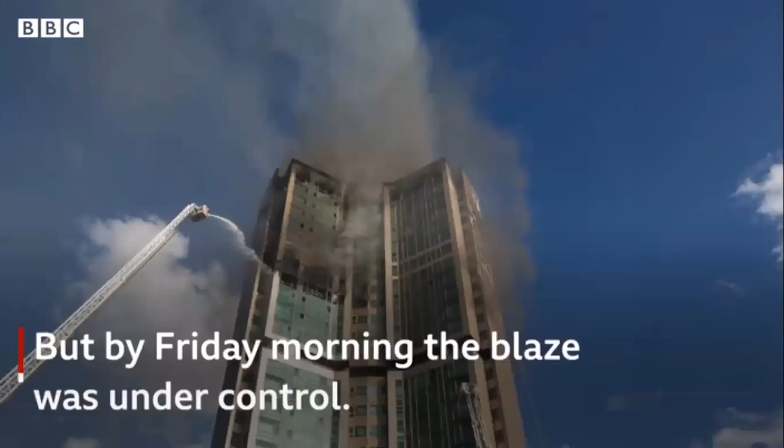I think it was just about 15-20 seconds. You have seen the way the facade of the building is burning, as if the envelope itself is on fire, and that is how the fire has spread through the facade of the building, whatever envelope material they are using.

Now let's have a presentation from Mr. Warick. He is Chief Fire Officer of MIDC and Director, Maharashtra Fire Services. Mr. Warick, you can please go ahead with your presentation.

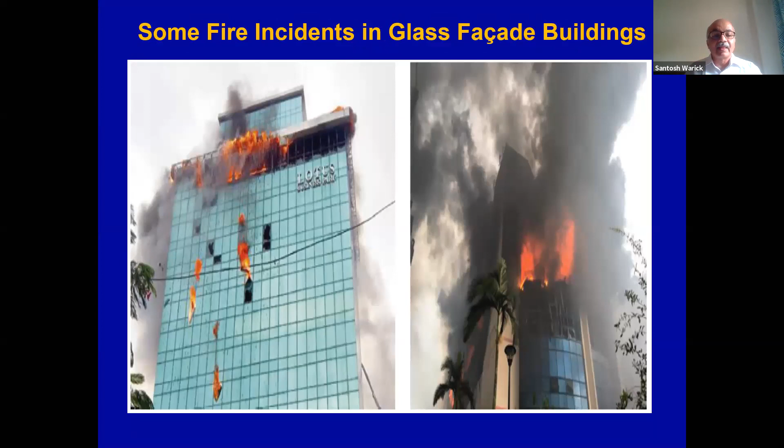So a large number of high-rise buildings are basically using facades, and in case of fire, it is very difficult to deal with such type of fires.

There is rapid spreading of fire externally, just as we saw from the external side, due to high wind velocity and combustible materials externally available for burning.

In case of fire, the characteristics of such fires are very difficult because these are all high-rise buildings, so evacuation time is more, the fire load is also more, and the gushing wind at that level contributes to the rapid spread of fire externally on these facades.

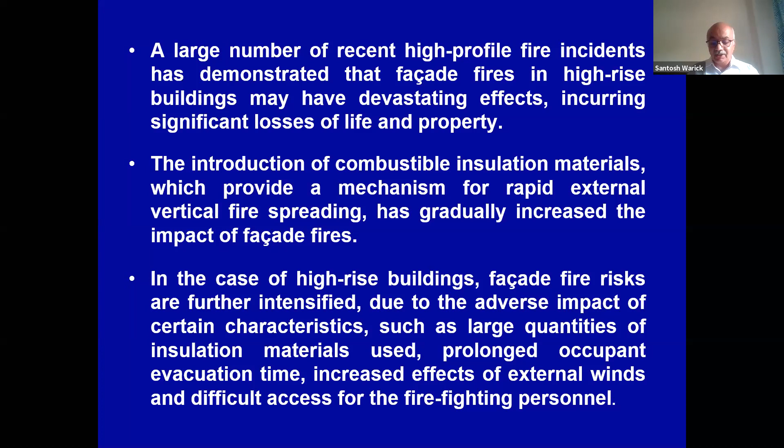These are again some incidences occurred in metros wherein firefighting from the external side is the only option to carry out rescue operations and firefighting.

High-rise building facade fires can initiate either through an internal source or from the external side - from DG sets, electrical installation transformers, or HVAC rooms on the floor, or from garbage containers in the building, from where it can start and spread.

The glass facades are in different compartments where combustible materials are stored, so it may internally grow, and externally also it can spread.

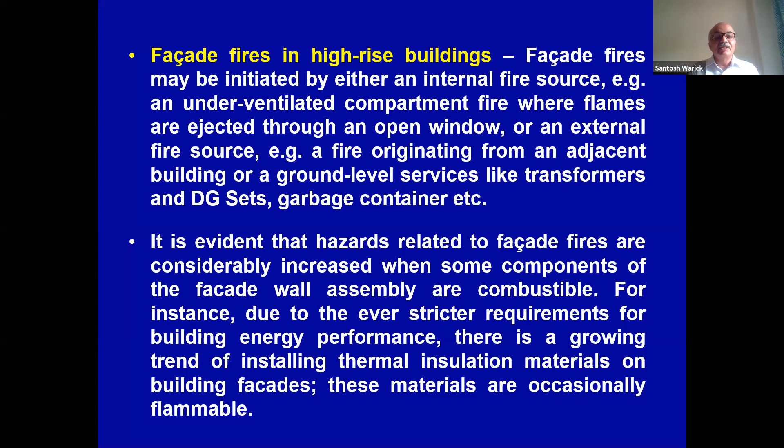In high-rise buildings, as compared to low-rise buildings, the composite panels or glass materials used externally create a stack effect or leapfrog effect on the building.

These fires are very difficult because, as we just saw, the burning debris coming out from these tall buildings may lead to pocket fires or may set fire to adjoining buildings also. So it is really a threat for the surrounding areas too.

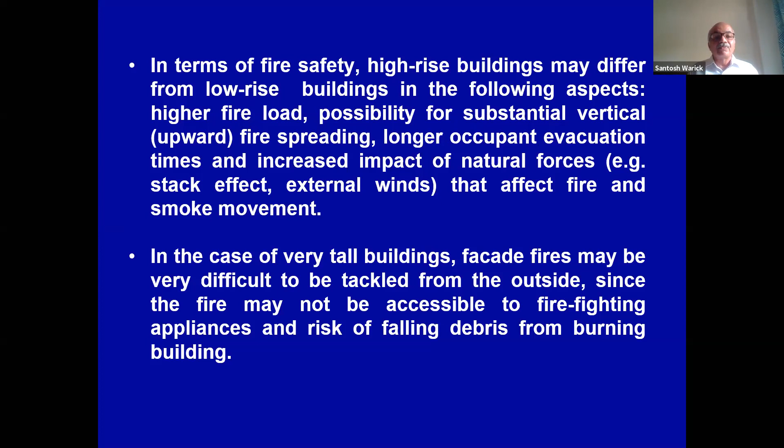Normally such buildings come up on a large scale because of external facades for aesthetical or glazing purposes, for the beautification of the building. But in case of real danger, because of non-availability of ventilating the fire, it becomes a very crucial issue for firefighters to carry out evacuation of the building and also to douse the fire.

These are the recent incidents occurred across the globe, in Dubai, Shanghai, and Grenfell Tower, London, which was the eye opener for the world, and everybody started talking about this challenge. So this is the major issue.

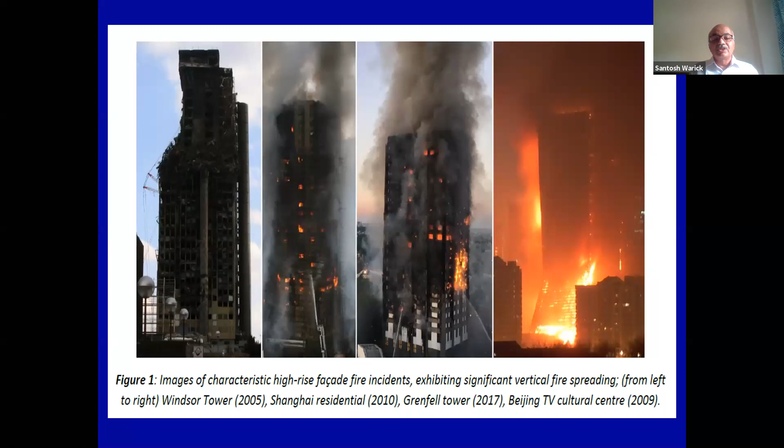If anything goes wrong in a building, the fire may spread from the external side or the gaps available within the buildings through the ducts or the gaps between the slab and the cladding. These are the major culprits from where the fire can spread on the external facades.

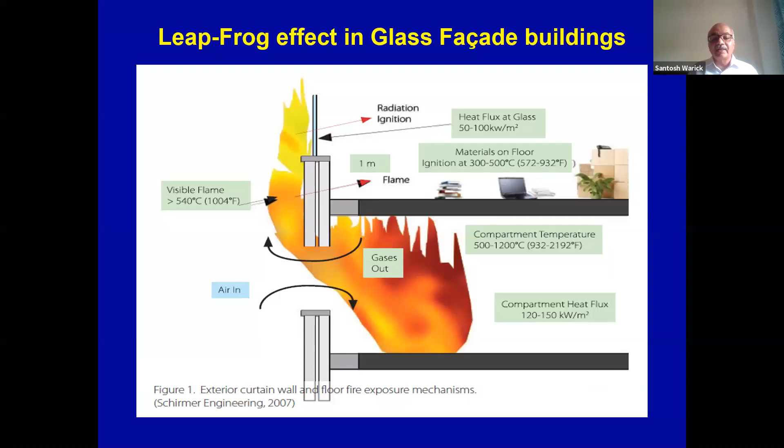Building envelopes, as I already discussed, are very aesthetically important for the building. NBC or any other international code does not put a barrier on the use of various types of material for the aesthetic view, but it poses certain problems in case of fire emergencies.

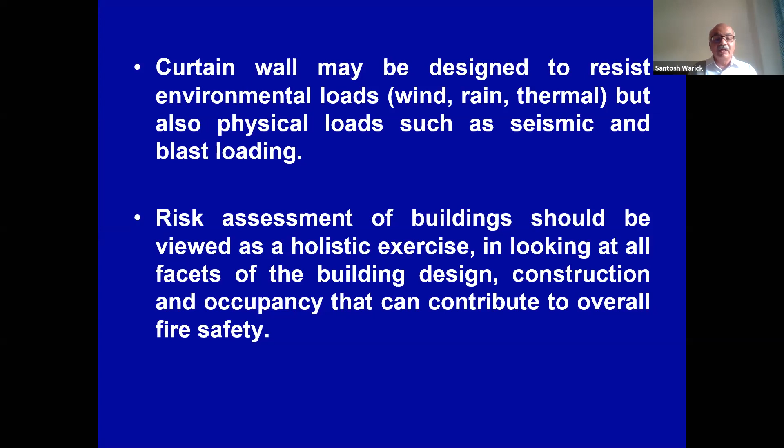So the major issue is fire spread via the surface of the building. This is one type of cladding, ACP - aluminum composite panels. In the incidences we saw, the ACP caught fire, and due to gushing winds, it spread vertically upwards and the entire building got engulfed in fire.

The second issue is spread from one compartment to another, due to the stability, integrity and penetration quality of that compartment material, and whether it has that much fire resistance rating. As per NBC, it should be minimum 2 hours fire rated. If it is glazing, it should be minimum 1 hour or 2 hours fire rated, depending upon the type of construction.

The fire separation within the facade system, from the exposure hazards point of view - if anything goes wrong on the adjoining side, due to radiant heat, the fire can set in on the adjoining building, and through the chimney effect, passing through openings and cavities available between the facade and the building slabs.

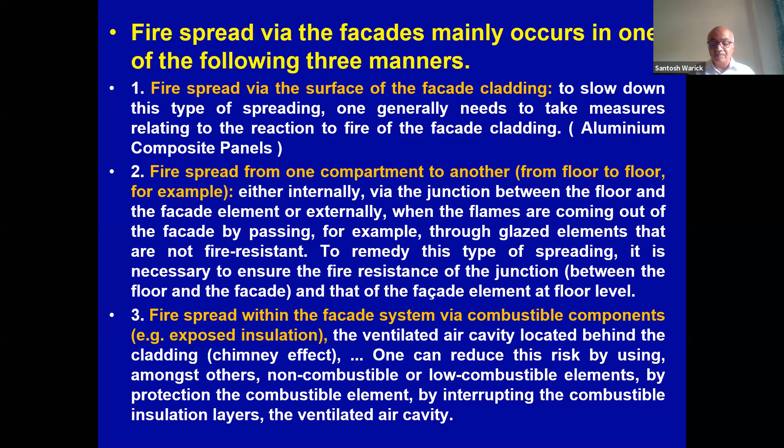If proper sprinklers are installed, then proper compartmentation and sprinklers can contain this fire. But if such facility is not available in the building, the fire may spread externally or internally through these vertical ducts, or where combustible ceilings are used, it can travel upward.

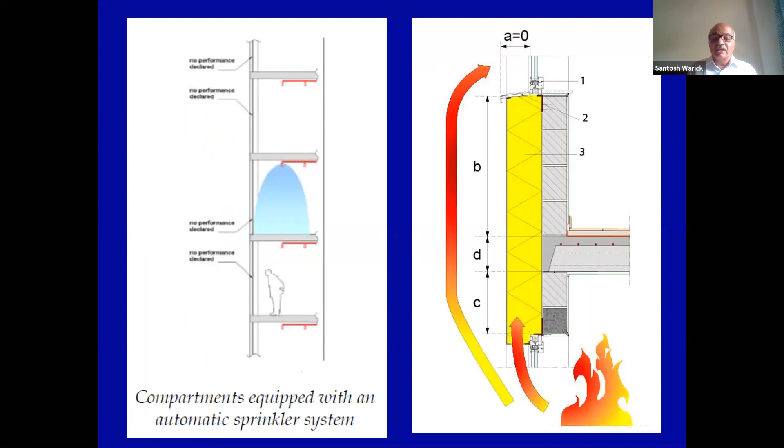This is again a diagram showing how cladding with fire rated sealant is used - fire stopping used between the floor slab and the facade. In such a situation, the fire will not spread vertically upwards.

But if it is a combustible insulation material, then fire may travel from this combustible material to the upper floors.

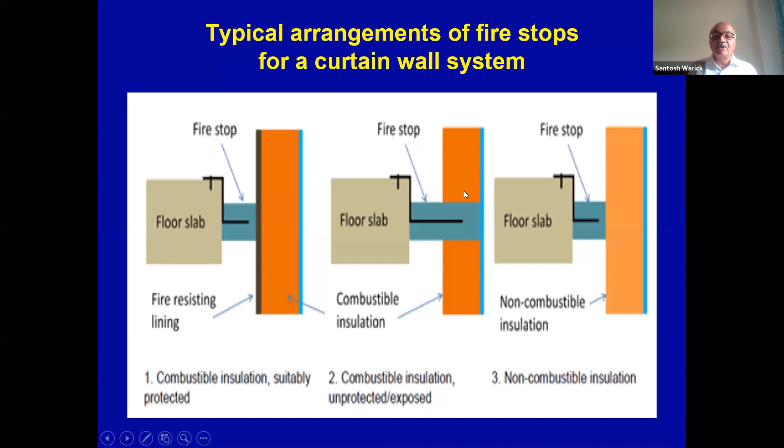So holistically, we have to see the arrangement of passive fire protection in the building. The major aspect is compartmentation, then openings in the floor or compartmentation passing vertically and horizontally - fire stop insulation should be used. Then for air conditioning, proper dampers should be used in compartmentation. Then surface spread, flame spread, combustible material, fire load, and glazing.

Glazing is basically covered under Part 6 and Section 8 of the National Building Code, Part Volume 1. In that particular glazing, as far as Part 4 is concerned, some guidelines are issued vide clause 3.4.10, wherein cross reference is given to Part 6 structural design, Section 8, glazing and glass of the code.

The requirement for the assembly glazing means glass is one part, or any composite panel is one part of the glazing, but the entire assembly should be as per type 1 construction or whatever type of construction is applicable to that building. For high-rise buildings, we consider only type 1 and type 2 construction.

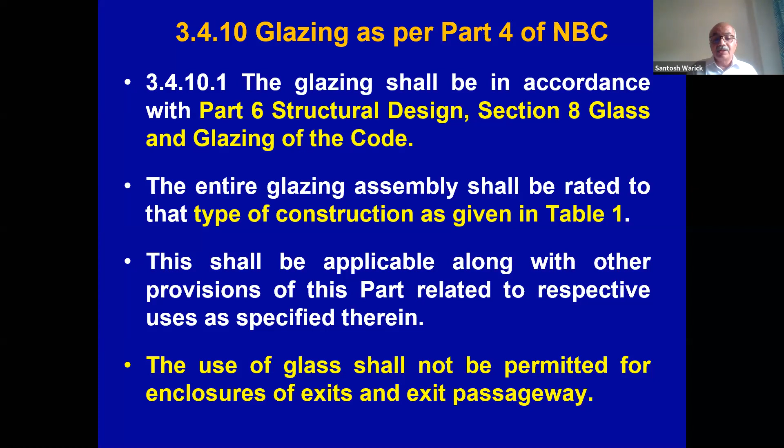As per 3.4.10.2, in a fully sprinklered building, if 9 meters separation is there, then the fire sprinkler head shall be within 600 mm of the glass facade. This is to cool the glass. If the glass is not fire rated, then the sprinkler will come in action and it can douse the fire.

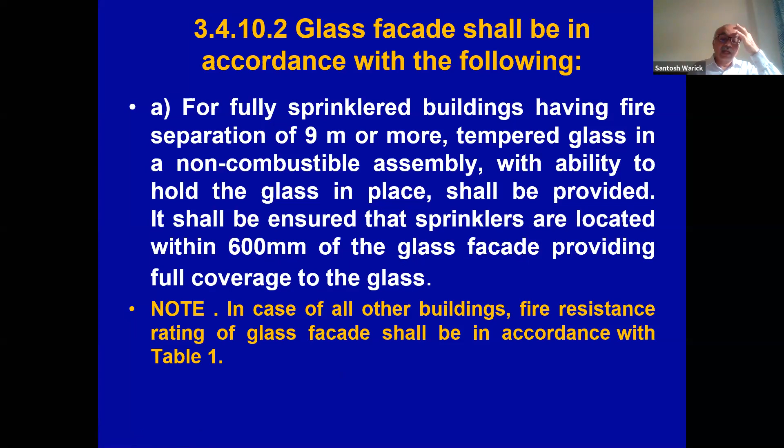Second is how the sprinkler will work. Here the standard sprinkler pattern is shown in this diagram, and the window sprinkler, which is specifically required for glazing protection, works like this, giving cooling to the cladding or the glazing material, so that it has more fire resistance.

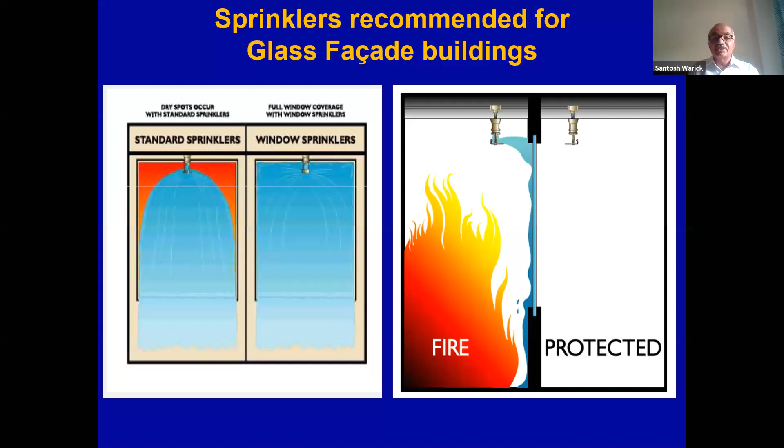These are the standard sprinklers used in the building.

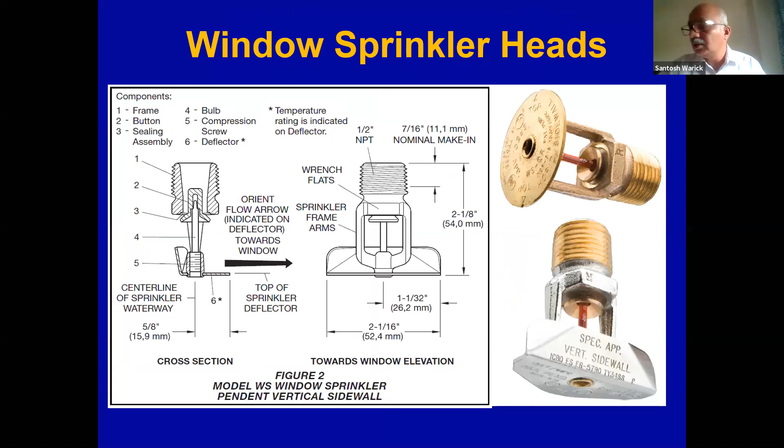Then this is the proper glazing, meaning the gaps between the slab and the glazing or external cladding, how it should be covered up. It should be properly sealed with approved sealant, and there are FM UL approved sealants which can be utilized to seal these gaps between the slabs and the cladding.

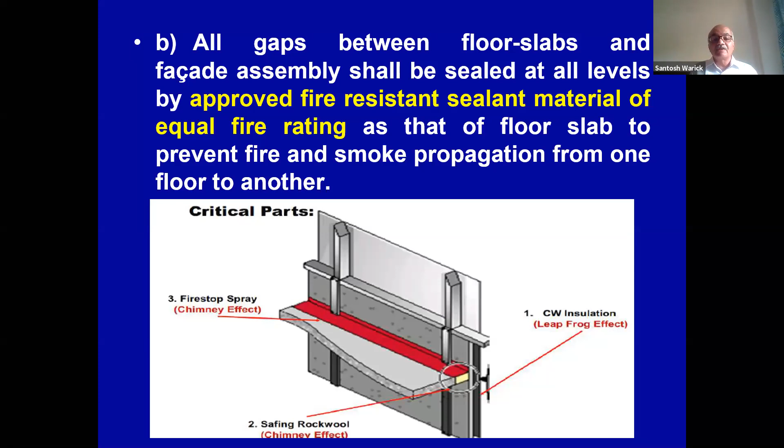Then there is a requirement for openable panels: after every 10 meters of gap there should be an openable panel of 1 meter by 1 meter, at a height of 1.2 to 1.5 meters, and it should be openable from inside. There should be a proper indication provided showing that it is an openable panel, and do not obstruct it. No material should be stored just in front of such openings.

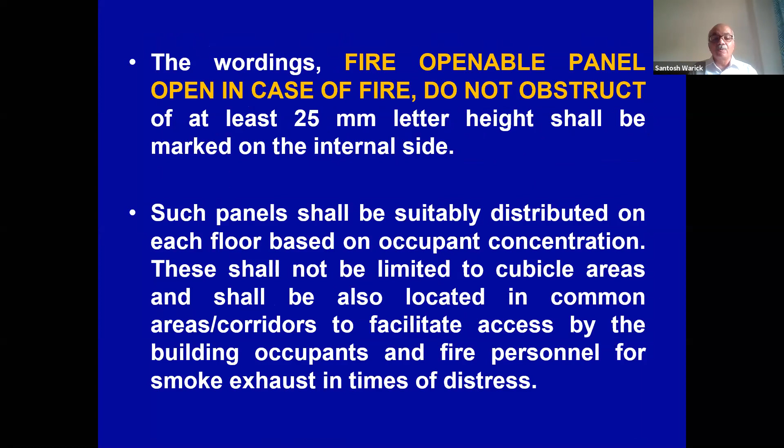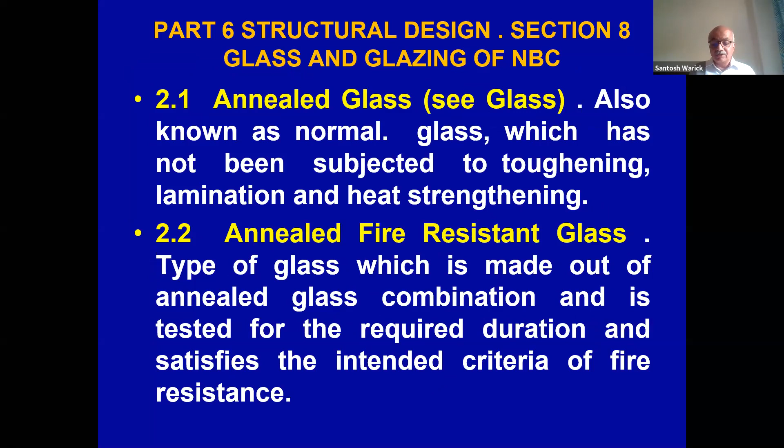As far as part 6 section 8 is concerned, different types of glasses are defined in this section: normal glass, annealed glass, then annealed glass with fire resistance, how it should be used, then curtain walls, non-load bearing curtain walls which can be used as an external frame with proper fixing, typically used for the vertical side of the building.

Then facade is the external side; it is a frameless system that is defined. Then glazing is the act of securing glass or any other glazing material in the building's opening windows, doors, panels. Then the tempered fire resistance glass.

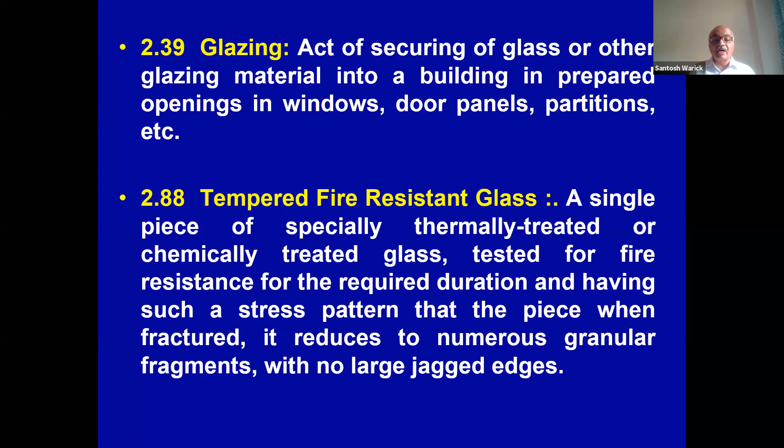This is important from the fire safety point of view: a single piece of specially thermal or chemically treated glass, tested for fire resistance for the required duration, having such a stress pattern in the piece with numerous granules. In case of failure, it should form into small granules, so it should not create any danger to the firefighter or activities below.

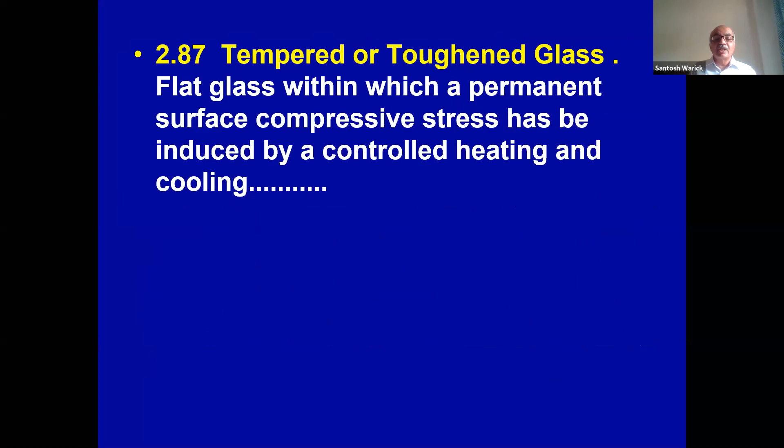There are certain guidelines given with cross-reference to Part 4 of the National Building Code, wherein fire rating and other important recommendations from the life safety point of view are given. As far as the necessities are concerned, this code is related only to fire systems, and it will not cover the requirement against vandalism, breakage, terrorist attack, earthquake, cyclone or any other things.

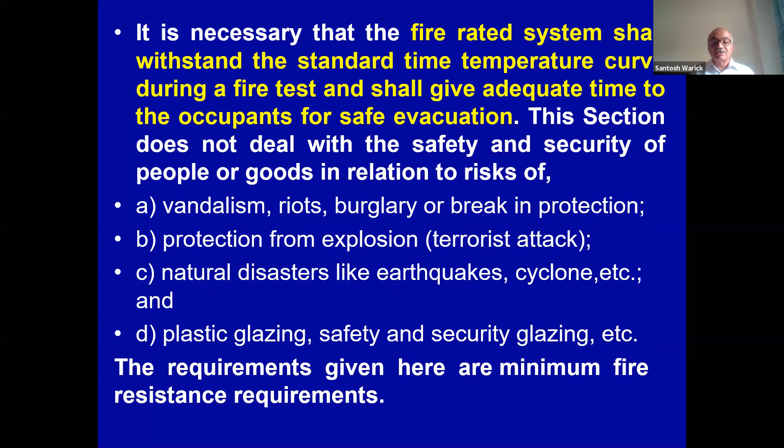So glazing for fire resistance is again important from the fire safety point of view, considering protection of precious human life and property of the building. The external or internal facade shall be of fire resistance, so that you have sufficient time for carrying out evacuation.

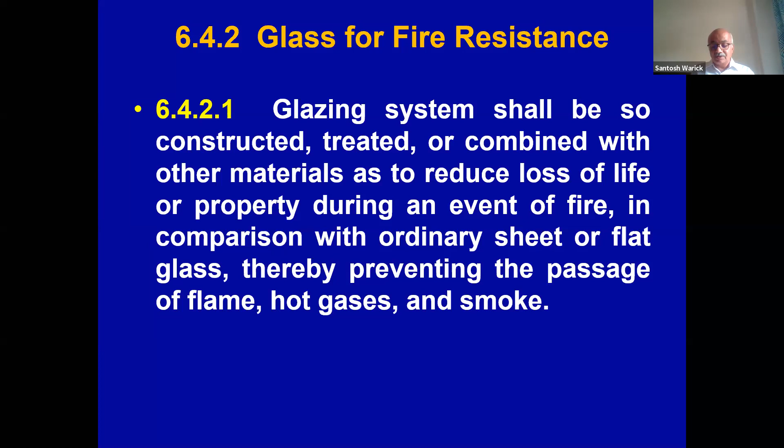In case of evacuation passages or common passages, fully glass shall not be used. That is the requirement. These are some glasses where you can have fire resistant glazing: wired glass, annealed fire resistance glass, tempered glass, laminated glass, double glazing fire resistance glass. So these are some glasses which can be used as fire retardant glasses.

Whatever panels you are using, it should be tested to that particular fire resistance. It is not only the glass which should be fire resistant, but the assembly attached to it shall have the same proper rating.

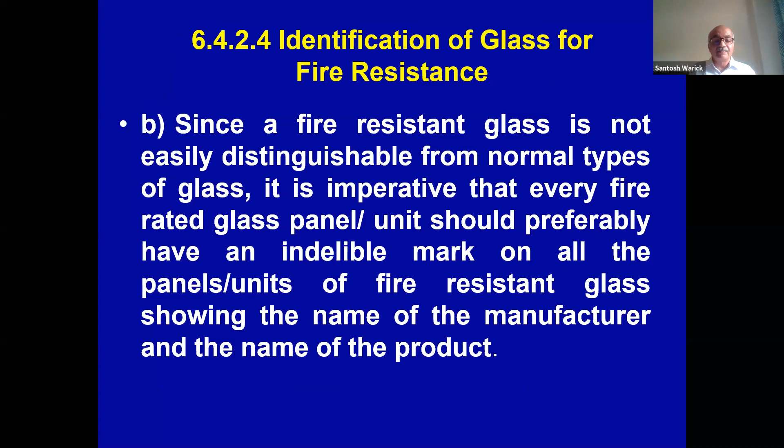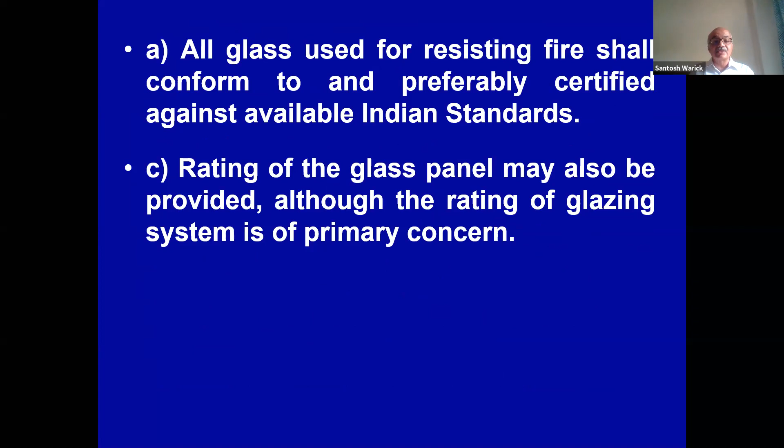It should be certified by either Indian standard or any international standard as per standard practices. This is very important. In Part 4 of the National Building Code, fire towers are provided with fire doors. The route or common passage leading to this shall not be protected with only glass, and fire doors shall not be of glass only. If glass is used for visibility, it should have proper fitting with fire resistance rating of minimum 2 hours. This is the normal common passage or common lobby for the fire tower.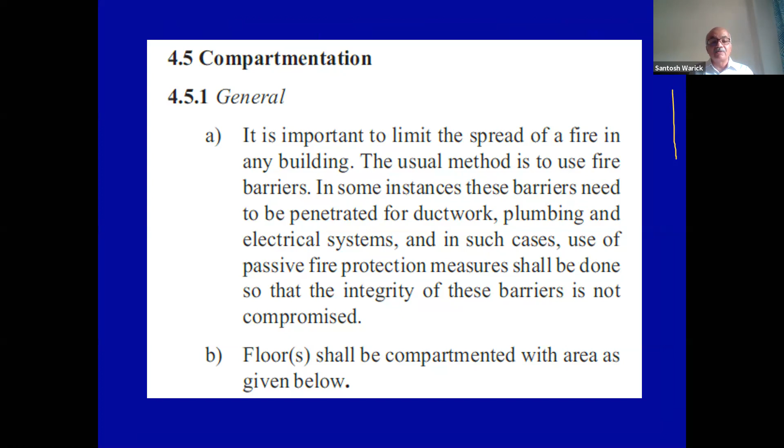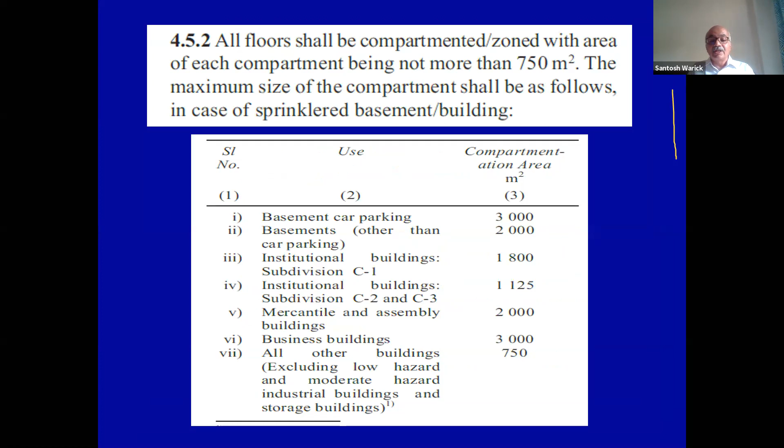Compartmentation is a very important feature in Part 4 of the National Building Code, wherein different materials are used for achieving compartmentation. For basements in hospitals, normally 750 square meters is the recommendation for compartmentation, but the external sides and partition walls, if used as glass or any composite panel, should have a minimum 2 hours fire rating.

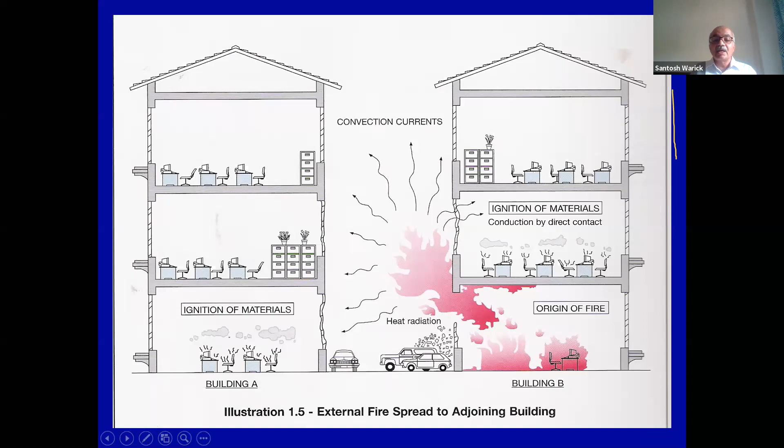The exposure hazard is another issue. If anything goes wrong in a building, that radiant heat can create a problem for the opposite building if proper distance is not maintained between the two buildings. Or internally, it can spread as shown in this drawing—by radiant heat, or through the passage of adjacent compartments, fire can spread. This is another example of where, from the origin of fire, the radiant heat can create problems for the external facades of the adjoining building or the same building on upper floors. This is again an example of radiant heat exposure hazard.

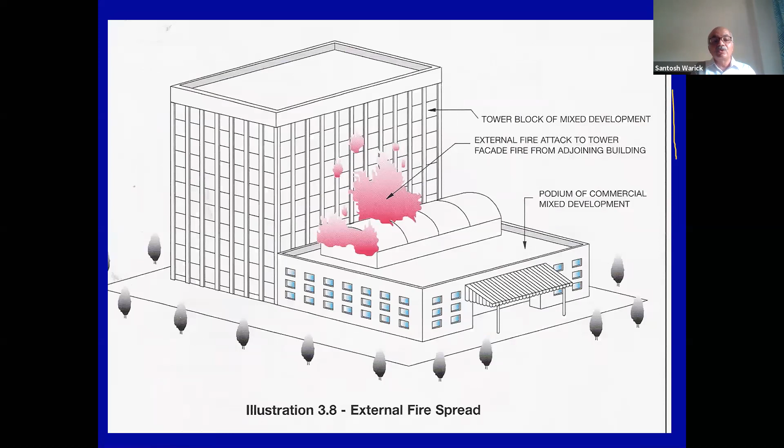So holistically, we have to look not only at the cladding, but the type of construction, the height of the building, the type of occupancy, the availability of automatic detection systems and automatic sprinkler systems, the building compartmentation, the availability of local fire services to deal with such high-rise buildings—whether they are equipped with aerial ladder platforms for external firefighting and rescue operations—the fire hazard load, the internal spread, and the building evacuation strategies. If we holistically look at all these aspects, only then will we be in a position to safeguard precious human life and the property or building envelope.

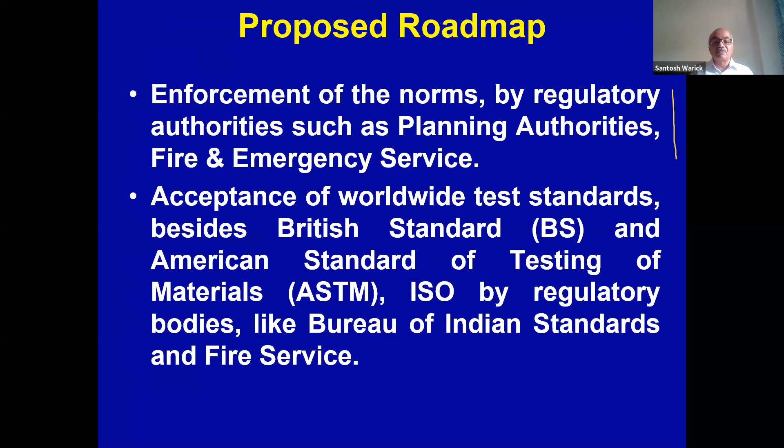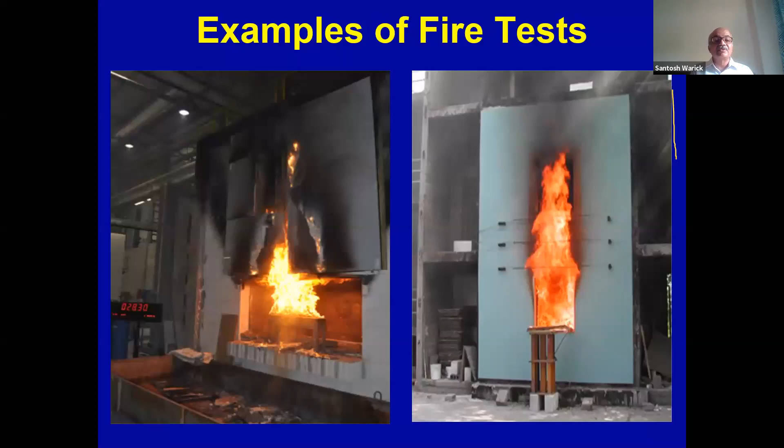The proposed roadmap—unfortunately, we don't have awareness amongst planning authorities and fire services about external cladding. Mumbai Fire Brigade, after a few fires in Mumbai, came up with guidelines for external facades. We have test standards as per British and ASTM standards, but unfortunately we have limited test labs in India for carrying out such tests. These are some views from test labs as per NFPA and BS standards, and some external facade testing features. The only issue is we have to create awareness amongst all stakeholders—architects, developers, civil engineers, fire officers—for more testing of this kind.

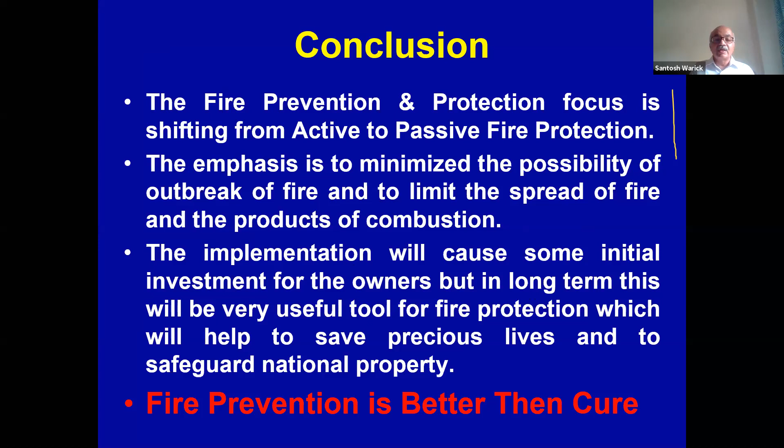A lab should be there, and only tested material should be used for external cladding. So the conclusion is, if we go for fire retardant material at the initial stage as part of passive fire protection, the cost will increase initially, but afterwards it will pay off in tons. Prevention is always better than cure. Considering that, we have to holistically look at this issue. Thank you very much.

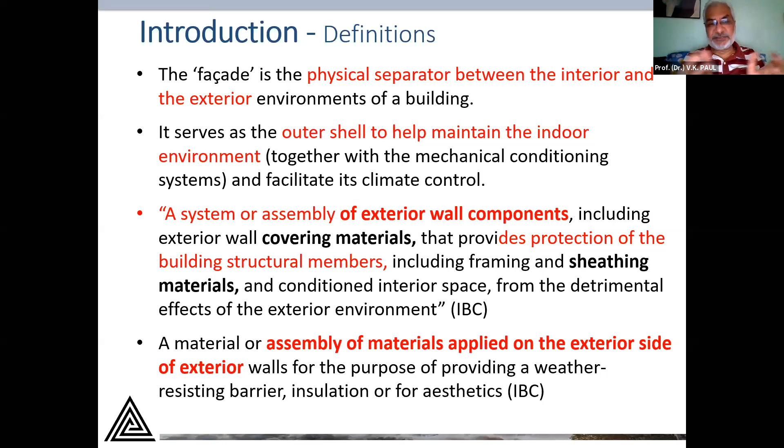And of course, fire is one. So what one is ultimately looking at is a large assembly of things, and many objectives put together will create a solution, and one of them will be fire safety. We cannot keep one objective alone - it's multiple objectives that work together. The objectives we find specific to the envelope are fire safety, firefighting accessibility if at all, asset protection, adjacent building exposure hazard, and business continuity - whatever activity has to continue.

Like for example, in today's building, there were almost 130 odd apartment owners. Now they have to be rehabilitated and taken somewhere else. That's what the government is doing now.

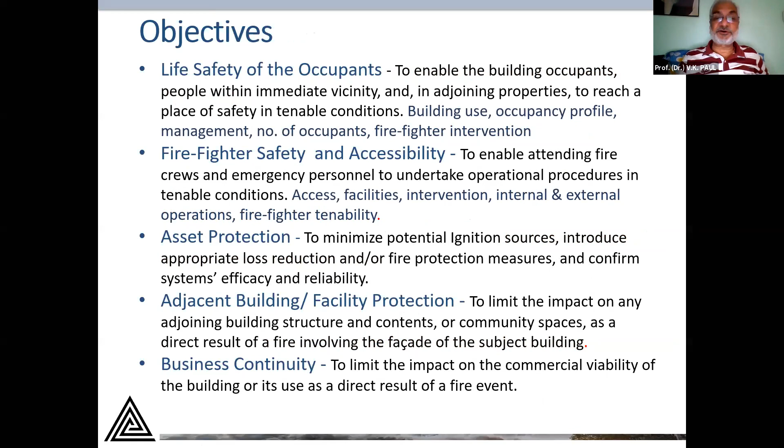Now looking at the facade component systems, this is what I've tried to sketch out - very elementary, wherein first of all, from our so-called architectural understanding, we classify building envelopes into two parts: lightweight and heavyweight. This is actually thermally lightweight versus heavyweight - one has a larger thermal mass, which is basically its capacity to hold heat.

The other way, lightweight is the envelope where the physical weight, the mass of the envelope, is also required to be minimized. So we cannot have a masonry envelope on a 40-storied building - it's going to have a lightweight composite construction, and that's where the whole problem starts happening. For 10-15 floors, we can have a masonry structure, which gives a much better advantage compared to lightweight. So for high-rise and tall buildings, one is looking at lightweight, and that's where the composition and complications of breach of two layers of assemblies start happening.

That's where the problem happens. Then we have a framing system, unlike the heavyweight masonry kind of envelope, which could be fire rated or non-combustible - it could be both. Now this kind of envelope necessarily has to have an external cladding, because weather and a whole lot of other purposes have to be fulfilled - weather, infiltration, exfiltration, insulation, they all have to be fulfilled.

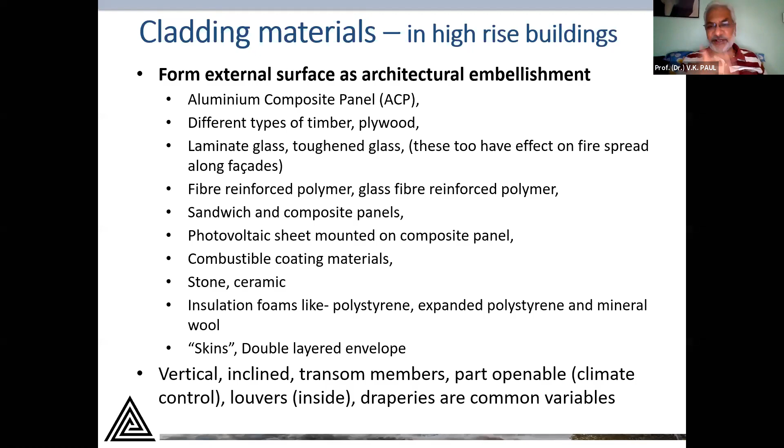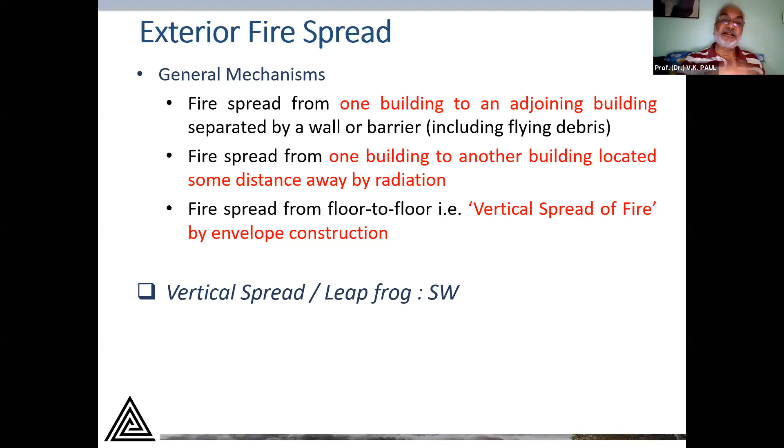Coming all the time, Mr. Barik has already covered that there are adjoining buildings, separation internally, outside, inside, and the spread of fire can happen. Now, instead of discussing NBC and pointing out things people generally don't like, I thought let's look at some other codes as well.

If we look at material composition, there are strict codal requirements for having restrictions up to 10 floors, or 18 meters height in UK and UAE, on what kind of materials are to be used. In our case, class 1, 2, 3 low and medium flame spread materials are still allowed, meaning even on an external surface, low to medium flame spread is still permitted. As far as a ban is concerned, we don't have any ban, nor does Australia, but up to 10 floors there's a ban in UAE and UK for certain components.

Insulation of cavities is very strongly regulated in Australia, UK, and UAE. We also see allocation of responsibility, and this is a very important part. In UAE, the consultant is required to have responsibility for all assembly, testing, approval, design, installation, and inspection.

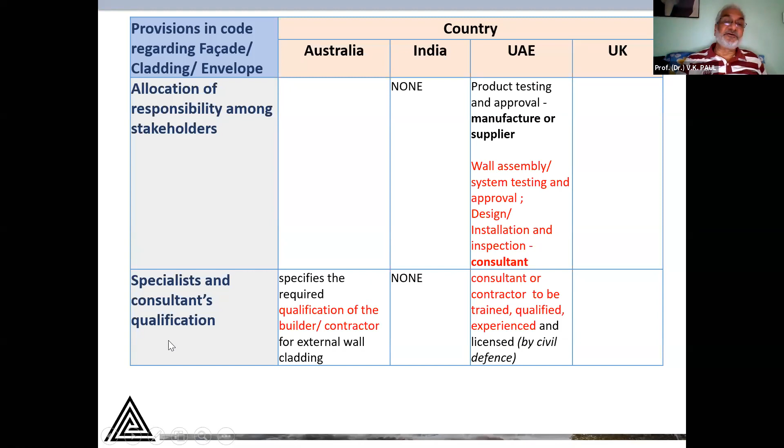Now this is something where even a novice, a kind of lecture-bazi person like me, can also become an expert. So you have to have a person who owns the responsibility, and that's very important in a repeatedly vulnerable area. Specialist consultant qualifications are also being talked about.

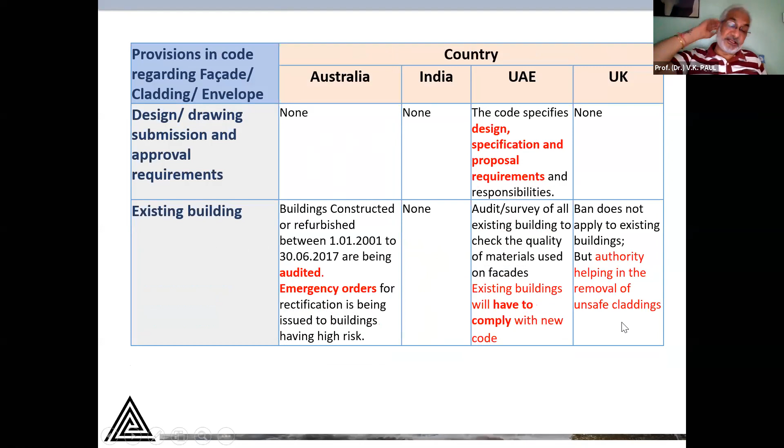And then we also have this issue of what kind of detailing is required, wherein UAE design specification proposals require detailed explanation. For existing buildings, in Australia, UAE, UK, there are some efforts to upgrade them, and in UK the government is facilitating this. Full-scale auditing and testing is asked for, not just a simple furnace or part assessment of a component.

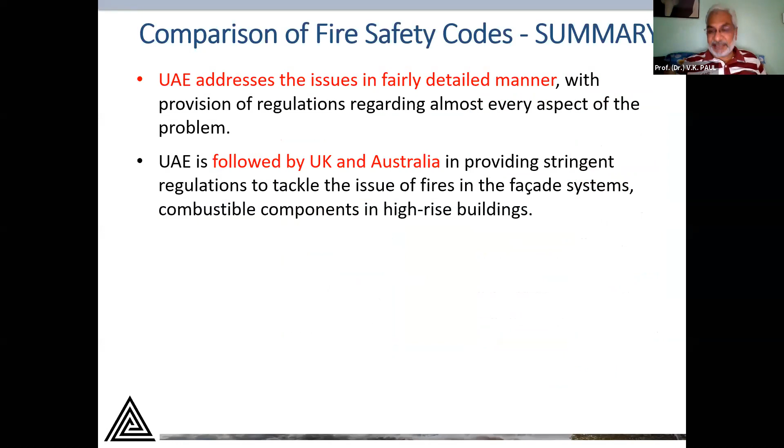There are penalties, there are building priorities, where certain priorities are given for the envelopes. So as far as this part is concerned, we find that elsewhere, codes tend to be a little more responsible in tightening the kind of building envelope that is required.

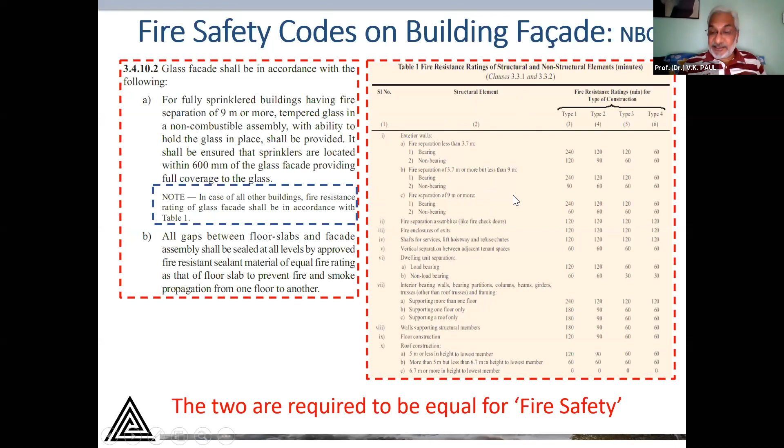But my question to myself is: if this left option is not there, the right is to be provided, then logic says the left is equal to the right. So is the provision of the sprinkler 2 feet away equal to the fire rating here? And if yes, then how? If not, then what? Now, the limitation of the sprinkler is also important to mention, because if there are transoms or bands coming inside the glazing, and we try to put water over that, does it give a uniform layer? That still is a question.

Of course, there are possibilities of a failure. Sprinklers under NFPA were so reliable that they removed the requirement of fire-rated spandrels and flame detectors way back. But that's because the consultant, the contractor, the execution, the monitoring, and the full-scale testing are so very stringent. And even in that, they are looking at 7% failures.

Unfortunately, if we put all our efforts into one particular option, then possibly there is some kind of skepticism. I don't want to touch on the kind of performances, etc.

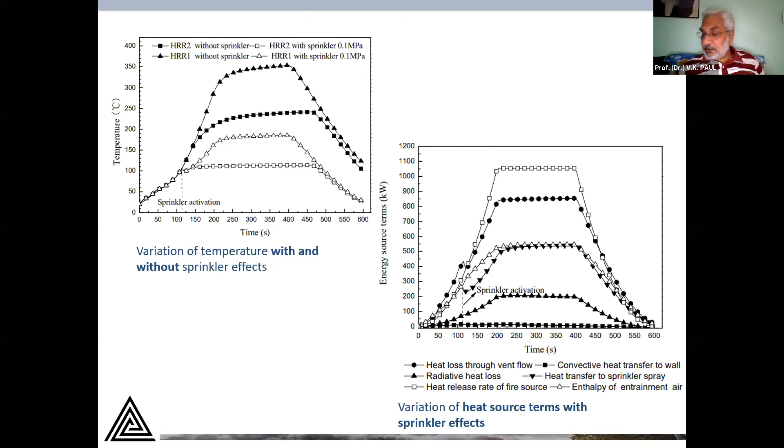But this is something I love, because it says that even when sprinklers are tested, the sprinkler actuation tested on a glass or anywhere, the temperatures still tend to rise above 150 and close to 200 degrees Celsius. So I'm not very sure whether all glass types will survive above 150 or 200. My understanding is toughened glass may survive around that kind of temperature, but nevertheless, that's an issue somebody needs to look at.

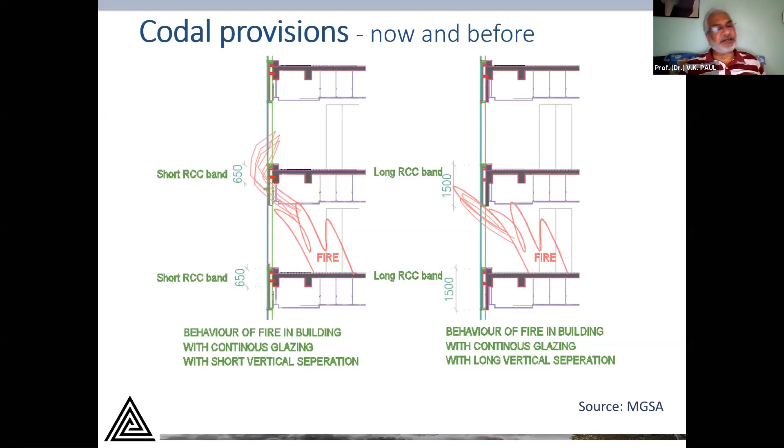Way back, there was also a spandrel requirement, where on the right hand side we find the fire gets deflected with a 1500mm spandrel, but now that part is removed, so it tends to close it. Possibly it was a better way, but nevertheless one can still adopt some deflection like that — it's an interesting thing.

Now the other thing is about the codal requirements, and one interesting thing one finds is that an openable vent for the smoke is to be provided 10 meters center to center. Now this bothers my mind — first of all, at what point of time is it to be used, maybe in terms of stress?

So when does the stress happen? What is the situation of stress? At the time of stress, would there be somebody there to open this? And if there is an openable part, I'm not very sure what kind of water flow in front of that would happen, including there may be some kind of member, but nevertheless, so there is a provision.

But the question here is that if a vent is provided, wouldn't the same vent then create a leapfrogging of flames rising up again? Because at that time, the stress has already happened, which means more smoke and hot gases are inside, and they can lead to the flames going up again. So there is still a question. Maybe I'm not an expert, I have no claim to expertise, but there is an issue.

Warik Saab and Sharma ji were mentioning about the envelopes. Well, these are all envelopes. Now, in these envelopes, there's the notion of smoke vent, the notion of the spandrel, and there are these members in between.

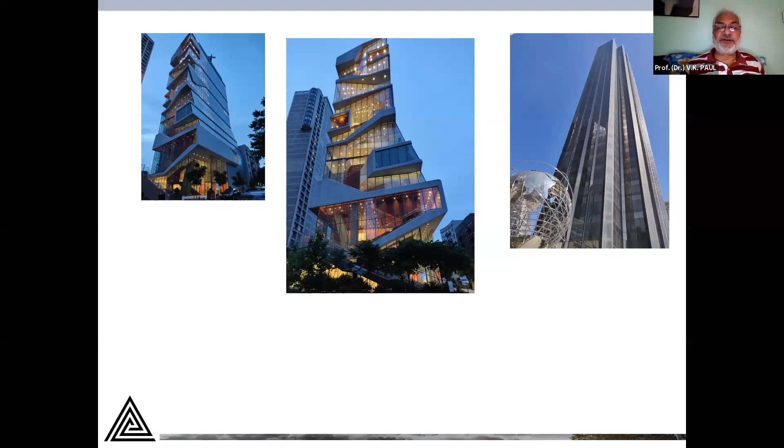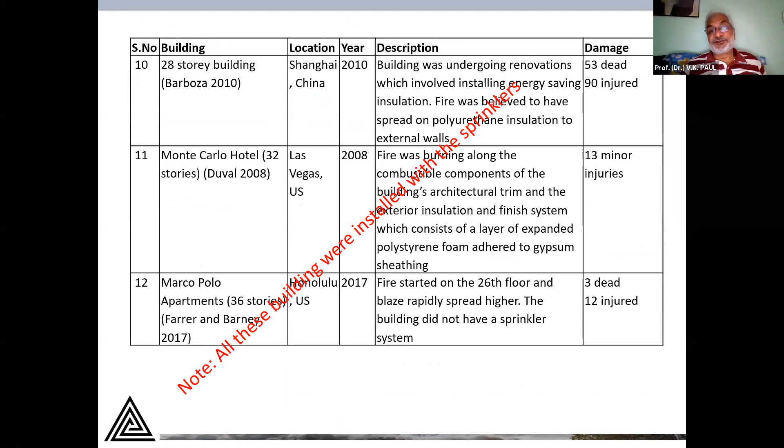Now, there are a whole lot of fire incidents all over the place one can look at. There is a big list, but my understanding is that most of them had sprinklers. So again, my question is, to what extent do we really depend on one aspect and consider the entire safety resting on that one aspect? There are pictures all over the internet of envelopes on fire.

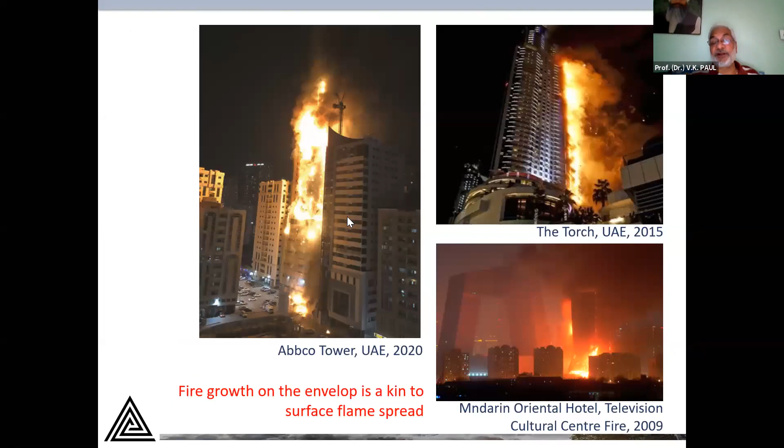And this is what our morning picture on the left-hand side, what was being discussed here in the morning, the film that we saw. Left-hand side, left corner is the photograph of the building that is left now.

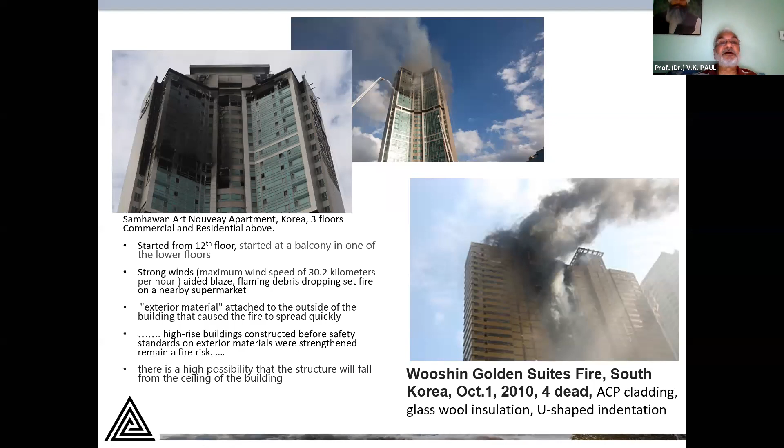Now this is a very interesting thing I found, that there is also a choice of material we need to be a little more careful about. I find that it's not the ACP or the polyethylene that is the problem, it is the aluminium itself that is the problem, because when aluminium gets water on top for firefighting, it creates some kind of dust aerosol, and that aluminium carbide creates a huge amount of heat.

What this particular literature I found says is that using water on aluminium is something like using rocket fuel. Probably aluminium carbide is actually a rocket fuel. So what I find is aluminium itself is a problem.

So what kind of materials? It's not only about being non-combustible, it is non-combustible, but which non-combustible ones are to be taken? This I'm not going to discuss. I'm not going to discuss this.

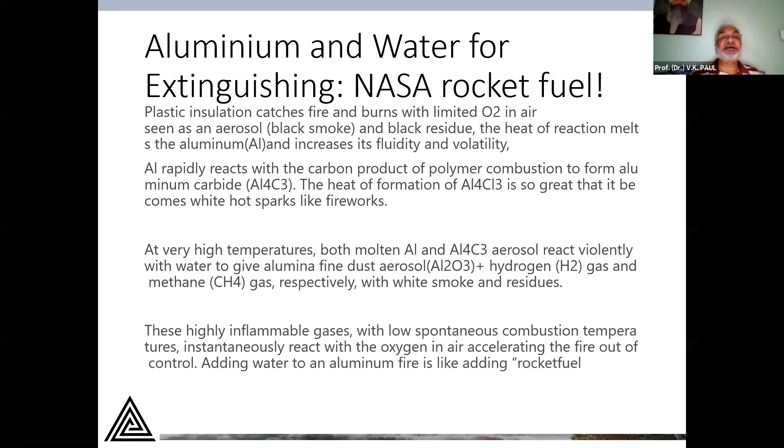Now coming to all these limitations of design, code, materials, everything will keep happening. But wise people will always innovate. So the way I'm looking at it is, in your mind, if you have a big vocabulary of how the phenomena happens, where the risks are, what the code does and doesn't do, and what you can do, you can create your own innovative solutions.

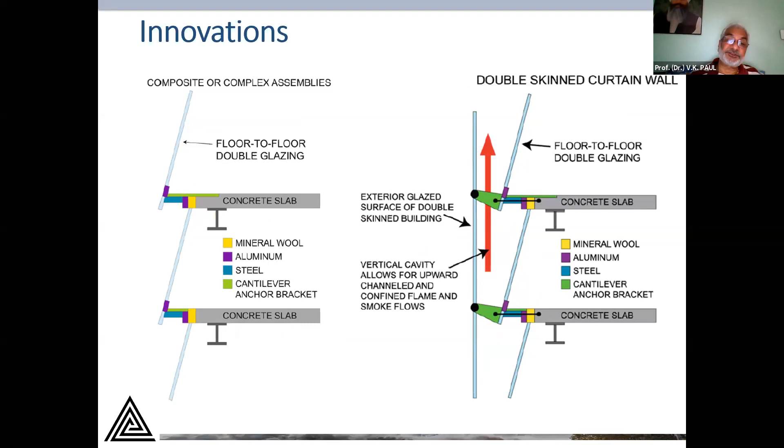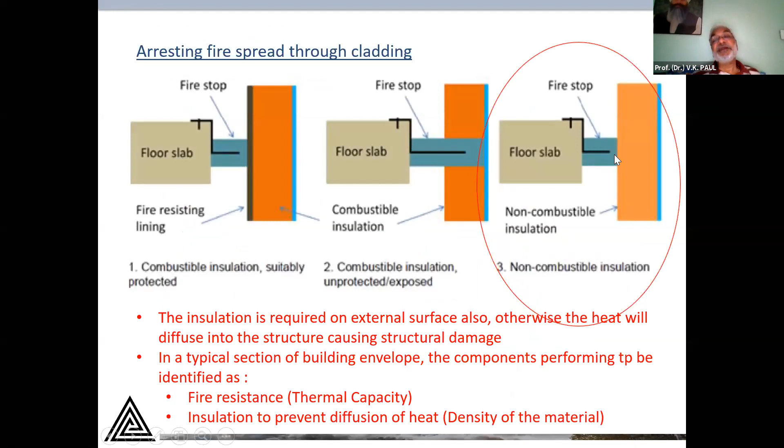Of course, these are all hypothetical processes, and we find many of these things. This picture was shown by Mr. Warwick also, but what I would like to point out here is that on the right-hand side there is an insulation, but this insulation is inside. Invariably, insulation in building envelopes will be on the outer side, and that's where it creates a problem for heating outside, because for sustainability, maintaining U values less than 2, or whatever is required, needs to be followed.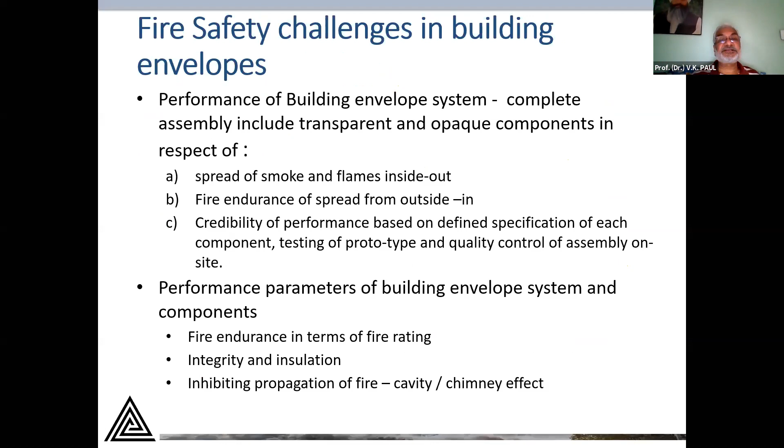I can leave this as well. Here basically I'm trying to say how the fire will always tend to go towards the glass, and then there'll be a whole lot of difficulties with cavities, etc. I can leave this as well. I can move to, okay, now let me come to the last one.

What we need is a clear performance objective for the envelope. I'm not interested in looking just at glass, openings, sprinklers, or doing this, that, and the other. I'm interested in total performance, where everything put together gives me safety for fire, fire resistance, incombustibility, no flame spreading, etc. So what is that criteria? I'm trying to look at that kind of criteria.

The other thing, out of all this understanding I've been able to get, is that the last thing anybody can look at is opening an envelope and allowing flames or smoke to go out. I've scouted enough literature, but everywhere the only condition I've found very clearly is that once the envelope is allowed to break, allowed to open, then it is free for all. So that opening is the performance requirement.

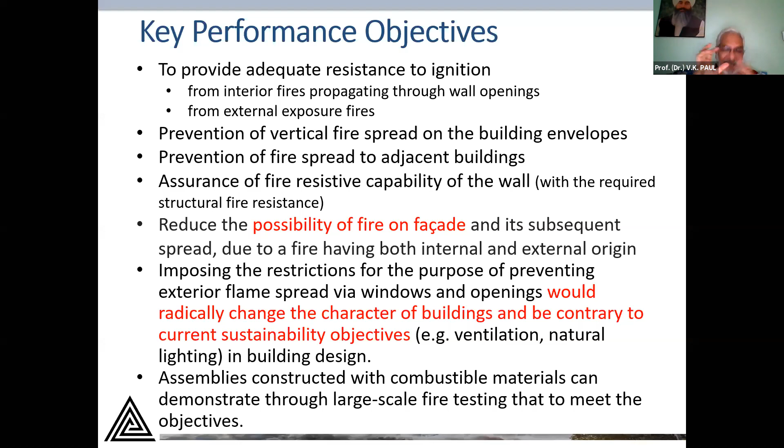So what I'm looking at is like 1, 2, 3, 4. If we can capture all the performance requirements and state that as the objective of my design, including the fire aspect, that will serve better. Unfortunately, that doesn't seem to exist right now in our own domain. So if I can create a defined performance objective of envelope and facade, leave the general sustainability aspects for others to decide, and only focus on fire safety, I think that goes a long way.

I've tried to discuss a lot of these points, but if there is any question, I can try to answer. That's basically what I wanted to share. No answers, but basically to throw open the gamut of fire safety risks that exist. Thank you very much.

Thank you, Dr. Paul. I think you have really gone deep into that. We try to be firefighters, trying to be on the surface where the fire is burning, but you have really gone into each panel, interiors, and the way things are going, and probably what needs to be looked into.

Now we have Sandeep Goel also. I think he has got a few slides to be shared. Let's have that perspective. He's the person who is providing the facilities and is a consultant, so he goes deep into the things while executing. You get to know really where the problems are and what is the more difficult situation for him. So let's hear his view also. Mr. Sandeep.

Thank you, Sharma Sahab. I am supposedly to be the consultant, which I feel I still do not deserve, because there is so much which I keep learning from my other colleagues. But we have been given responsibilities to ask for advice, and we try to work with deep passion and sincerity. We do realize the subject is so wide, it requires a more holistic understanding. I feel very small in my understanding when I speak to senior colleagues like yourself, Mr. Warwick, Dr. Paul, or Chiller sir. I really feel small about the knowledge I possess about it. But having said that, I would like to share some inputs about my understanding on this piece.

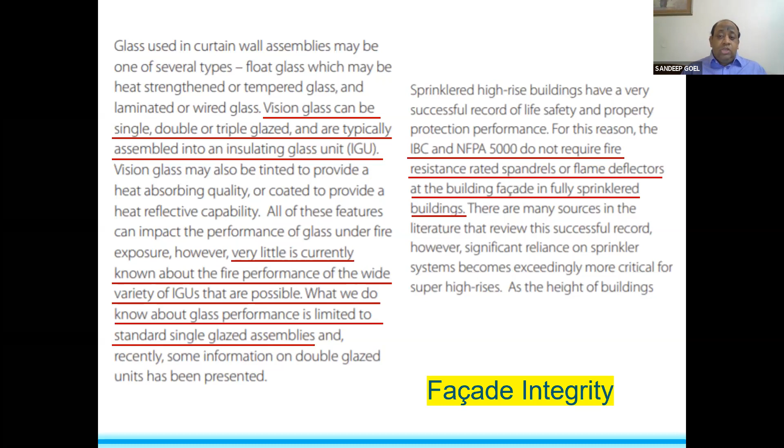As far as facade integrity is concerned, and what Dr. Paul has explained in very good detail about Grenfell - what exactly happened was that the consultant landed up choosing the wrong material for the facade, which was not meant for such a high-rise building. As we saw the comparisons done by Dr. Paul, it very clearly highlights what kind of suitability is accepted depending upon the height of the building. Now, when it comes to signing off the technical submittal, the consultant probably made a mistake.

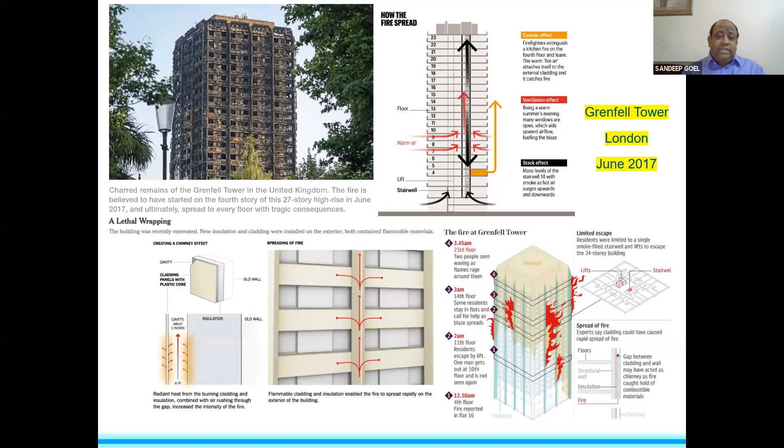The consultant took the L1, the low cost option, without realizing that the insulation material, the cladding material he was selecting, was not meant for a project which is 23 floors. That is where the challenge starts. So you selected the wrong material, actually compromising the safety of a building which was actually safe in many ways. One of the other things was that the building also had partial, non-operational sprinklers.

If you really look at the NBC, while it talks about the fire resistance rating, as was described by Mr. Warik as well - very surprisingly, you will see NFPA 5000 says the fire resistance rating for exterior non-bearing wall is zero. The difference here lies in the fact that you are really not looking at the fire resistance rating of external material, but you are looking at the non-combustibility of those materials.

Rating is the endurance of a material to sustain fire when applied on one side of it. Combustibility is that the material will not combust if fire is applied. So although in our system we are talking about rating systems, actually non-combustibility is the most important aspect to look at, rather than really looking at the rating part of it.

We are also talking about whether it is glass used in facade - meaning my home, your home, which has windows where we use glass - or whether we are talking about a facade glass building. Now these two are different things. You are talking about glasses in facade, which are less vulnerable, less challenging, or you're talking about a building which is completely curtain wall - that means it's a glass facade.

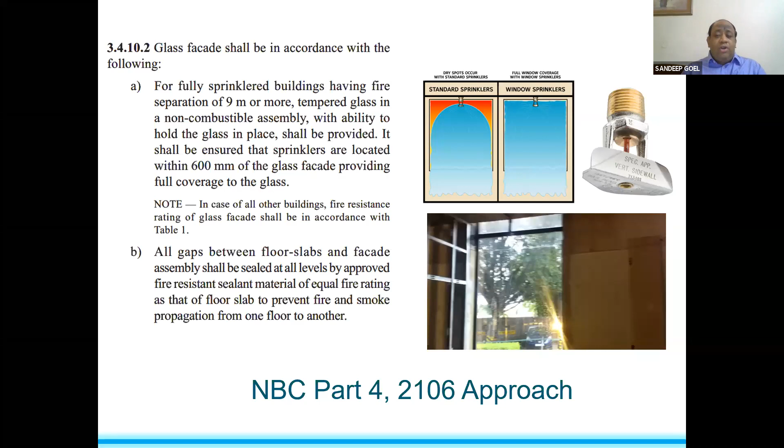Having said that, the code actually works around this, and I don't need to repeat it again. It talks about the various mechanisms. The only important aspect being mentioned is that if the building is sprinklered, you do not have the challenge of fire breaking out to the exterior of the building. And if you are more careful about locating your sprinklers at the right location to cover the glasses, you have met your objective of cooling the glass, and you are not really looking at the rating to be provided - that's my understanding.

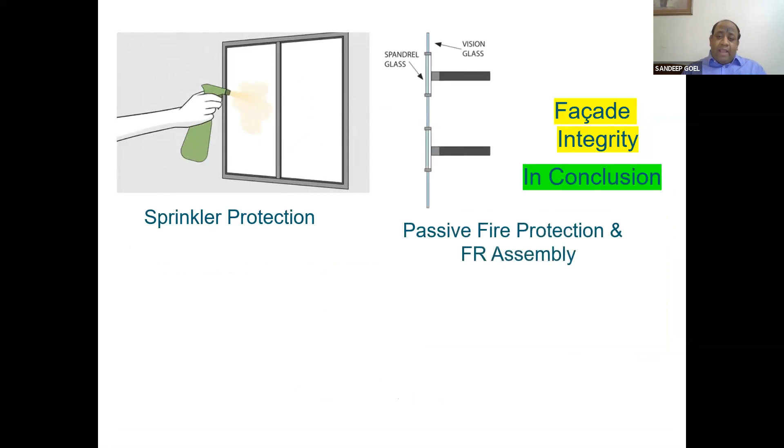So if you really look at it, if you are providing sprinkler protection and you have a passive fire protection mechanism, then with these two aspects, you do not really require a fire rating of the external facade. I'll move quickly.

External access - so we have completed one chapter, integrity. There is another example here where I see in Mumbai they have provided fire access panels. So are these fire access panels meant for people from outside to enter into the building?

Is this what we are wanting? I don't really think so. Warik Saab can educate us better, being an operational firefighter, on whether you really need to access the building from outside, break the panel and get inside. I don't think that is the objective of an access from outside. Now, with the fire tower being provided, I don't see we are requiring these mechanisms to enter from outside the building. So even if you look at the egress, egress is not required.

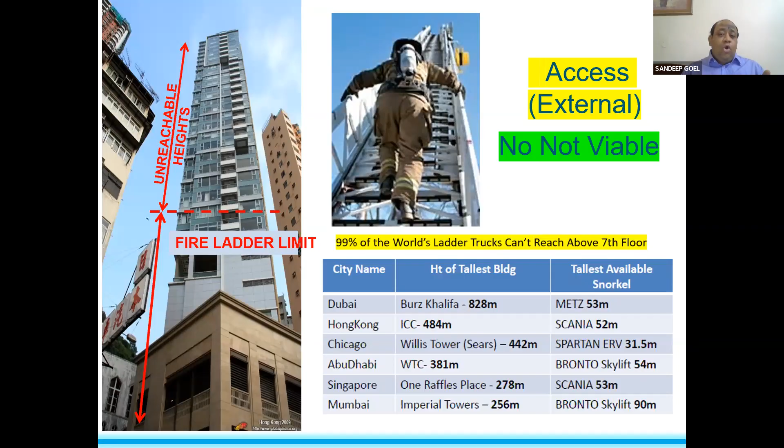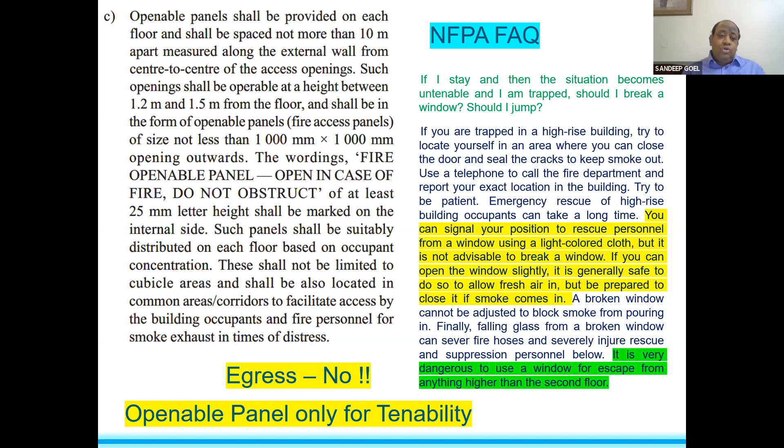You need an operable panel. If you see on the right hand side, this is an NFPA FAQ. It tells you that I need to have an operable panel for tenability. Nobody is going to go and open the panels for you, but in case you are trapped inside the building, the operable panel helps you for the purpose of tenability in the space you are stuck.

The National Building Code also talked about smoke venting facilities in windowless buildings in 2005, but with the 2016 version, the buildings are no longer windowless. There are windows, and if you provide operable panels, they provide tenability. So once this tenability is achieved, you really do not need the egress component for the purpose of jumping out of the building for safety.

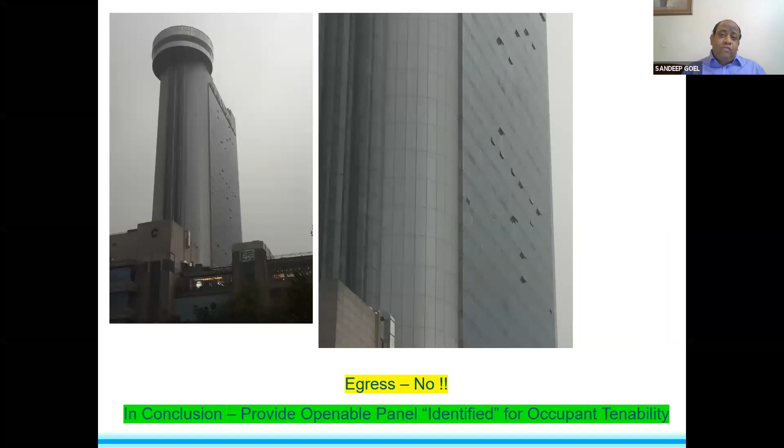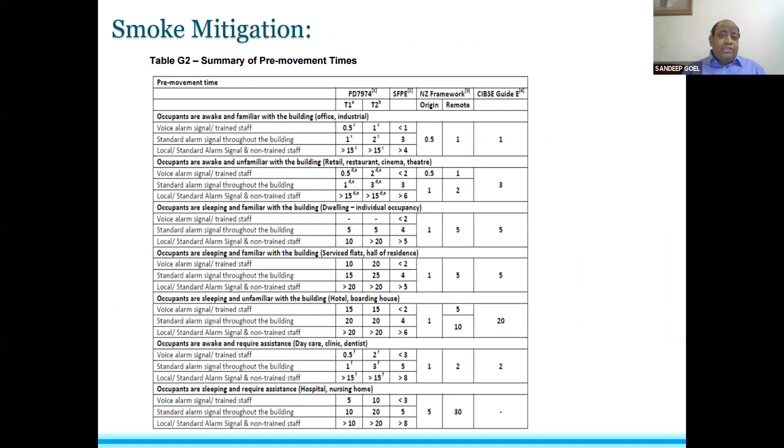Risk profile - we have different types of risk as per British standards, for various types of occupancies, and how people would be reacting to it. If you really look at it, smoke mitigation is a major challenge for buildings like hotels, where people have sleeping accommodation. If you look at the calculations, the pre-movement time for a hotel is 20 minutes versus an office, which is 1 minute.

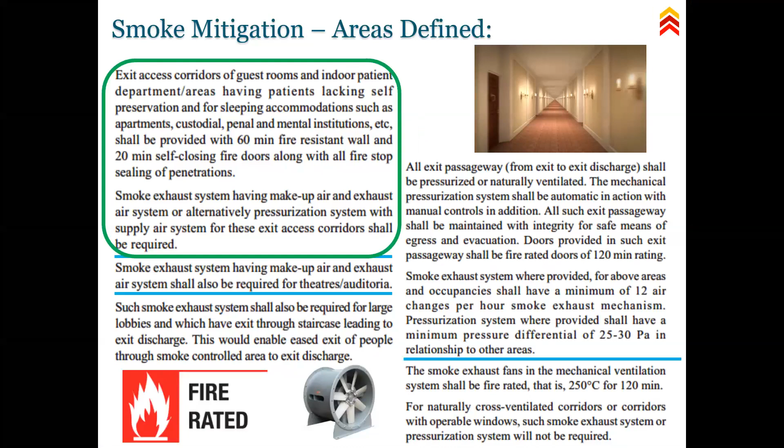So really speaking, the National Building Code presently identifies hotels, hospitals, auditoriums, and basements for smoke mitigation requirements. It is not really specifying the requirements for offices. So from that aspect, if you have the right type of window operability for tenability requirements, and you have smoke mitigation provided for auditoriums, hotels, and hospitals, you are being taken care of, to control the spread of smoke into other areas.

So primarily, this is my feedback, sir. If you really look at it, we do not need accessibility from outside. We do not need to evacuate people from outside. You do not really need a very large smoke mitigation system for very big halls, primarily for offices and other spaces. But sleeping accommodations very much require smoke mitigation, which can be engineered through various mechanisms.

So really speaking, the facade does not require, to my understanding - and I can be corrected - fire resistance rating. It requires more towards the non-combustibility of materials which are being provided in the facade. So I will stop here, Sharma sir, and thank you for this opportunity. We can please interact as you kindly feel to speak on this subject.

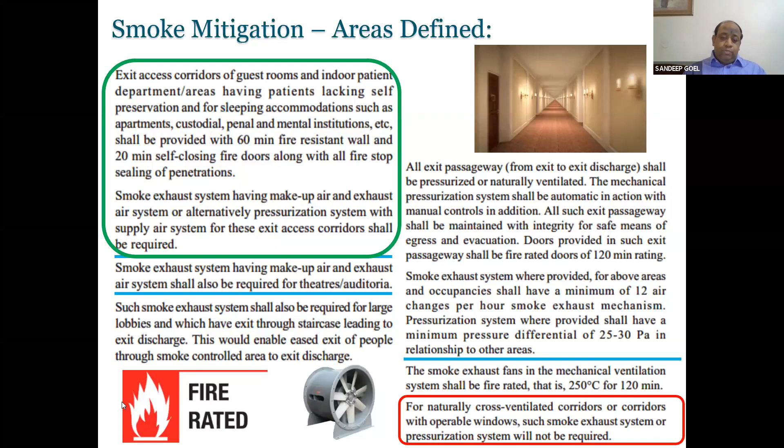Okay, thank you very much, Mr. Goel. I think we have got today about 20-25 minutes for the question answer session. Just to note, Mr. Warik is also an operational person. I too have been in this operational area. So my perspective, taking cue from whatever Mr. Sandeep has said, I tend to agree to that extent.

When we say the facade buildings or windowless buildings, we have created some openable windows. I'm not sure whether it is really possible to use them for escaping people from there through the fire brigade, because we do have buildings beyond the reach of fire brigade ladders - maybe more than, say, we have got only 70 meters or so in most cities, but a few cities have 90-meter ladders. But beyond that, what do we do?

So we do have buildings up to 200 meters. So now talking about this type of action, that somebody can come to that place and try to be saved by the fire brigade, appears to be really not possible. Because going back to that stage will be very difficult for him if he's trying to see that somebody will come and save him from there.

Number two was mentioned by Mr. Sandeep - smoke mitigation. I think yes, this is a very important area when life is involved, and probably rescue of people is involved. In fact, I feel that if you are able to take care of smoke management and smoke venting, then in a way you are taking care of the spread of fire as well, because if the hot gases and smoke from the passages and areas of access are managed, then the fire brigade can reach fast, access the fire, and take care of things.